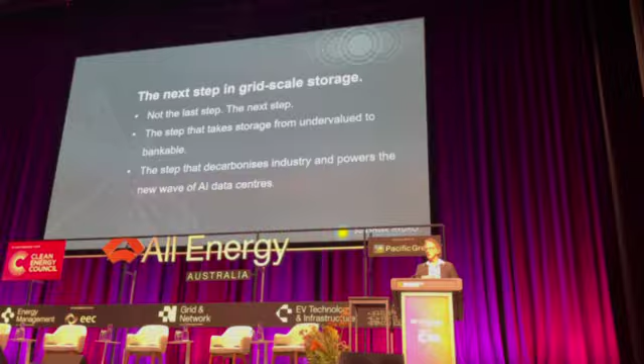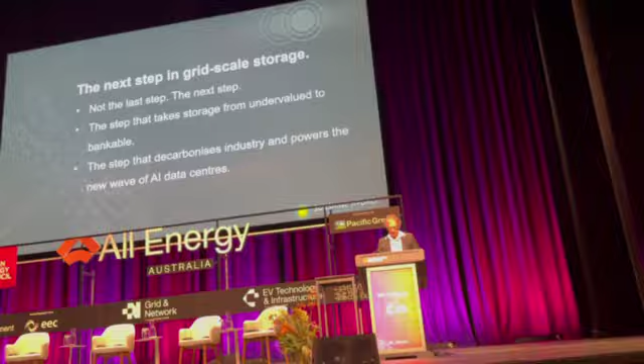The next step takes storage from being undervalued to being bankable. These big essential projects, they must be successfully delivered. We're talking about the ability to make these projects financially viable, and get investors excited about it. It decarbonises industry and powers a new wave of AI data centres, which is also changing within our industry. Australia has a huge advantage in attracting these data centres, and it's already happening. We're seeing it happen over the next couple of years. These new data centres need cost-effective, reliable green energy to prosper.

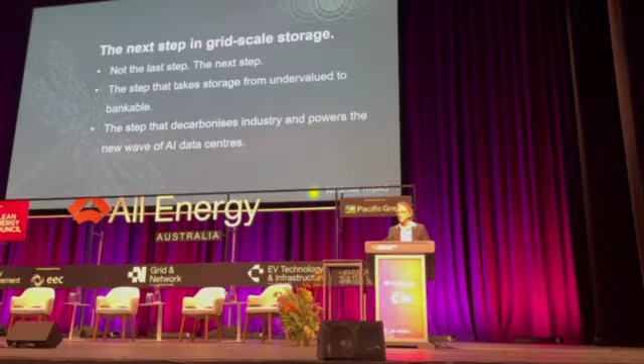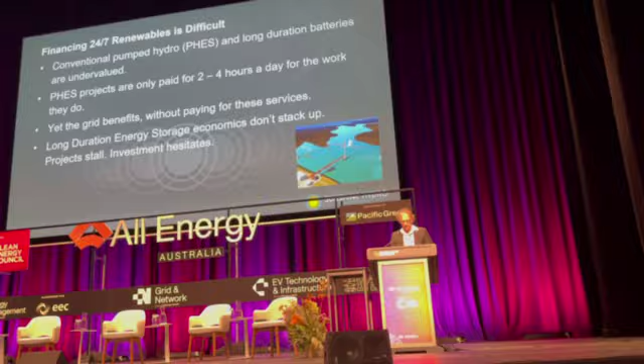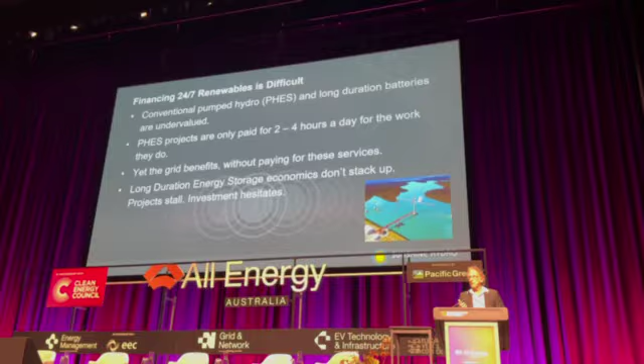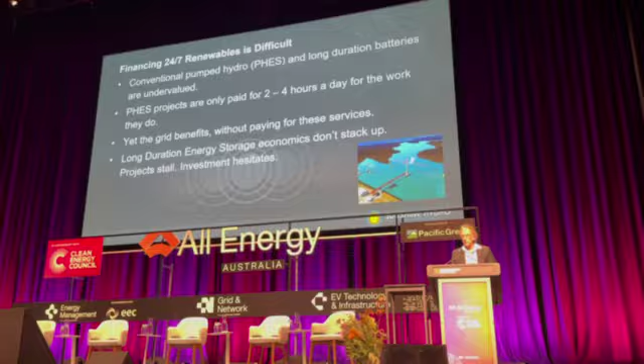So where are we today? Pumped hydro and large batteries, or any long duration storage, they're undervalued in the current system. They're assets that are only paid for 2 to 4 hours a day. If it's a small battery, that's perfect, you can justify it and pay it off in that 2 or 4 hours, it works really well. But for pumped hydro or long duration energy storage, you need more than that, and it serves a greater purpose. Financing these big merchant-exposed projects is really difficult, and that's why long duration energy storage projects stall. The economics simply don't add up and investors hesitate.

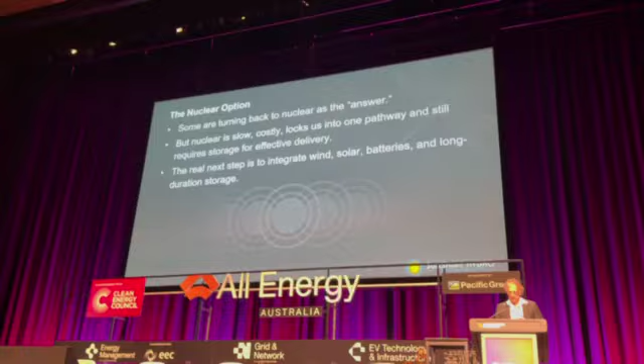Some say that nuclear is the answer, but nuclear is slow, it's costly, and it still needs storage. It may well be the next step for the US or for Europe, but it's very difficult for me to see how it's the next step for Australia at all. It's a little bit too expensive.

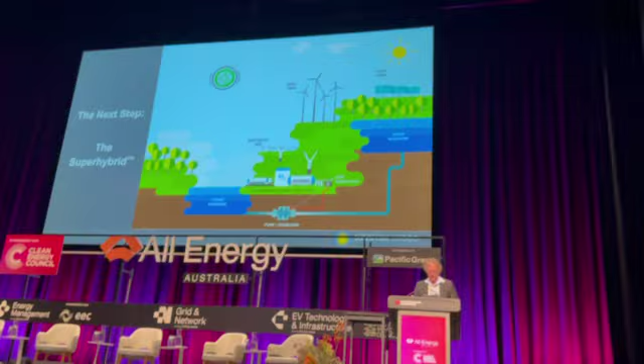So many are coming to realise that the next step revolves around the superhybrid. The superhybrid technology has been developed over the last 8 years to solve a practical problem: how do we deliver 24/7 clean energy to industry at the lowest possible cost? The superhybrid is an ecosystem that brings together renewables, long duration energy storage, and smart optimisation. It reliably matches energy supply to industrial demand every hour of every day.

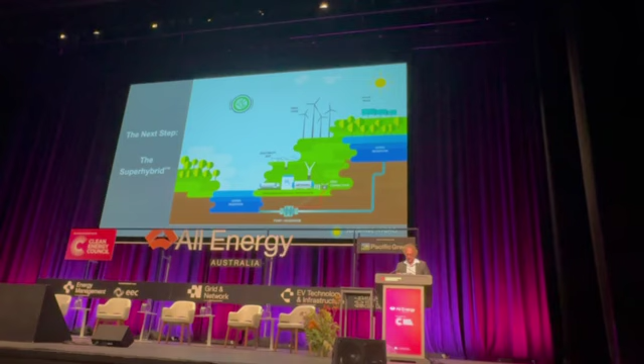When these projects are delivered as public-private partnerships, they can also make smart use of sovereign credit wraps—simple government-backed guarantees that lower the cost of capital and unlock faster investment. The work we're doing with one major production facility to provide for their green energy needs provides a clear example of how this approach works in practice.

So this is a dashboard of one superhybrid running live, and it shows it operating at 4:10 yesterday afternoon. It's delivering 950 megawatts of reliable 24/7 carbon-free energy to the data centre that you can see in the top left corner of the screen.

Every 5 minutes, the system's making decisions on where to best deliver these electrons that come in. As they're delivered from the wind and solar projects, they can be used to pump water to the upper reservoir, to charge the battery, to produce green fuels, to deliver to the data centre, or to sell back into the grid. So this optionality maximises the ability to use every electron as effectively as possible.

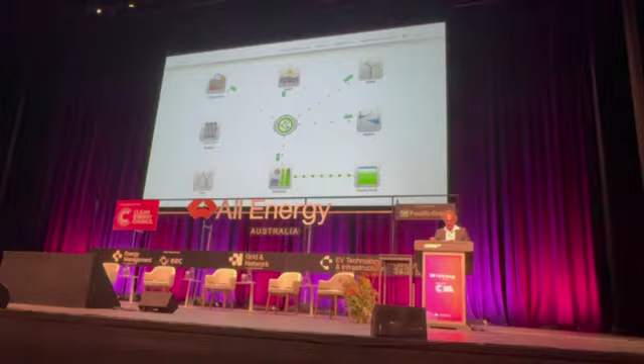The technology behind this focuses on making sure that data centre gets its 950 megawatts 5 years into the future—when everything goes wrong, when the worst scenarios occur, how do we deliver that power? So we're not looking at a daily cycle, we're looking at future problems and being able to provide that to a system that needs 24/7 without doubt.

And it does it in a fun kind of way. Things like, if the week ahead is looking very windy, there's a problem—because if it's very windy and there's low demand, the wind gets curtailed and we waste that energy. But because we can take these electrons and decide what to do with them based on what's happening in the future, we can make sure we've got the energy: we want the reservoir full, we want the battery full, we want to be able to turn off the electrolyser so that we've got maximum power at all times.

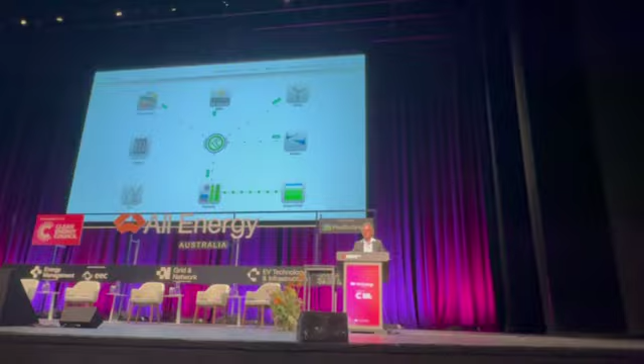But we also need to look at when wind is high in the week to come, that we can value the empty space in the upper reservoir, value the empty space in the battery, and say, let's lower it. Let's optimise it properly. We need that reservoir because of all the wind coming in next week—we need to lower the reservoir so that wind can be utilised. And what that does is protect the other assets: the wind is stopped from being curtailed, same with the solar. So the opportunity is to make use of every electron throughout.

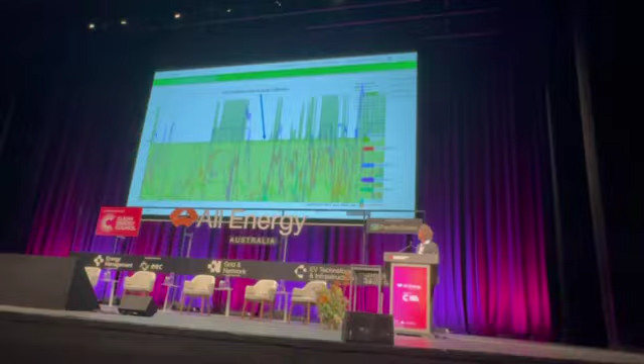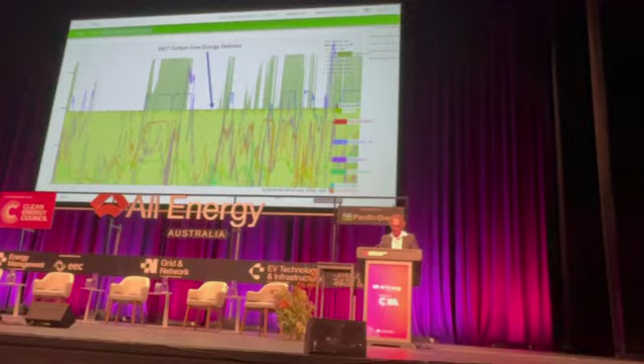So this diagram shows the 950 megawatts. The green line across the centre of the screen is showing that energy being delivered to the data centre. It's 24/7 carbon-free energy, as reliable as nuclear power, but delivered at half the cost.

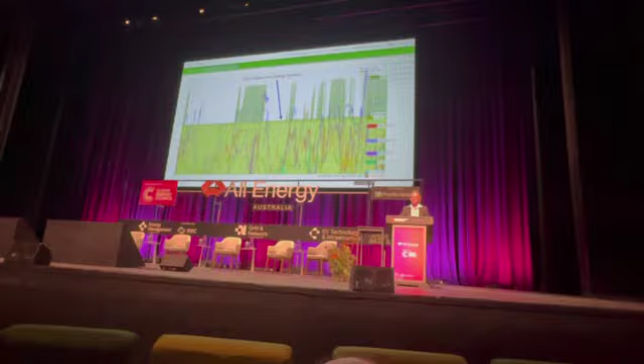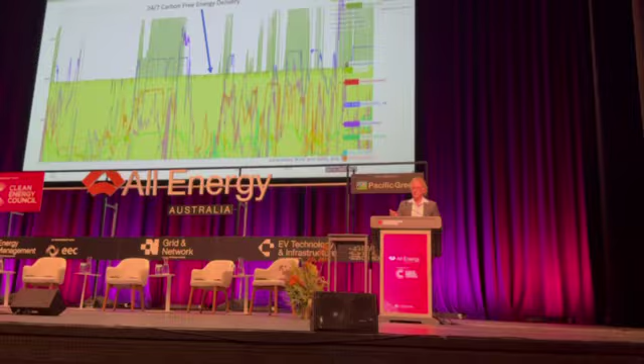On the diagram, you'll also see the spaghetti diagram, we call it—they're all the wind farms producing and providing the wind. At the upper portion of the screen, the darker green is the electrolyser kicking in. The electrolyser is there to produce green fuels, so we've got another contractable revenue, but it's also there to soak up the wind. It's an extra sponge, an extra storage mechanism. And the beauty of it is we can turn it off.

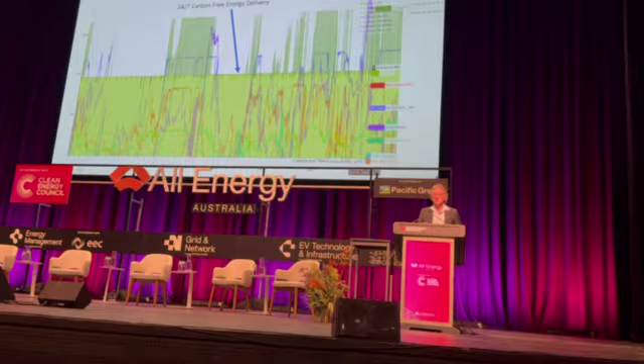We actually value that we can turn it off. It's a little bit unusual the way it works, but that's what ecosystems do. They work hand in hand.

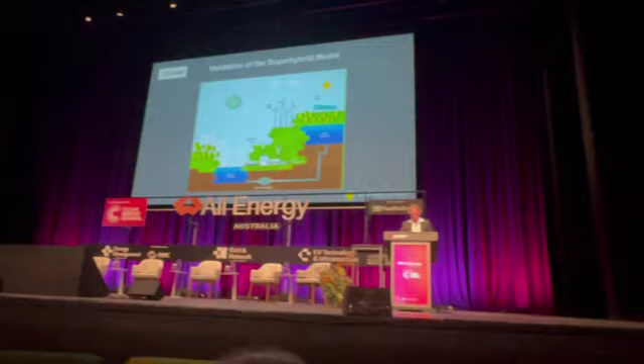The superhybrid model is the result of over 8 years of development, and it's been a massive effort to deliver this kind of change to industry. The US Department of Energy has contracted one of the world's leading laboratories in energy innovation to implement and study the superhybrid model in the California electricity market. They're doing that right now. Their mission: can the superhybrid deliver reliable, cost-effective energy for the AI data centers that they know will need the power? And this laboratory is validating what we're doing on a global scale for the first time.

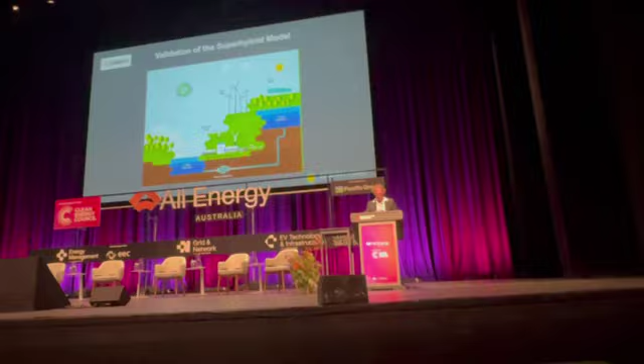So for me, this is a major milestone. I can't tell you how proud I am of the team members at Sunshine Hydro. Some of the best engineers I've seen, the most amazing people to work with, and it's been a true privilege to support them.

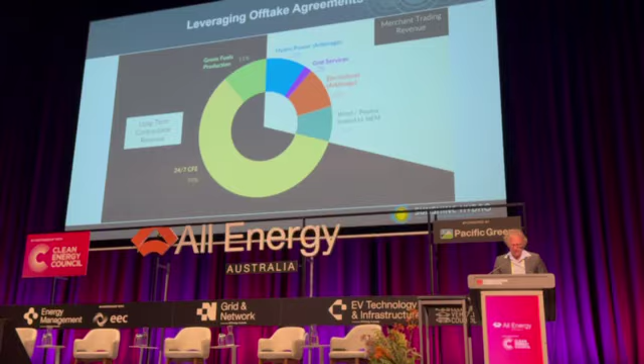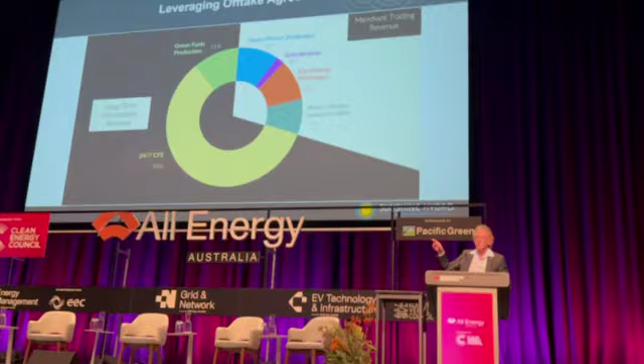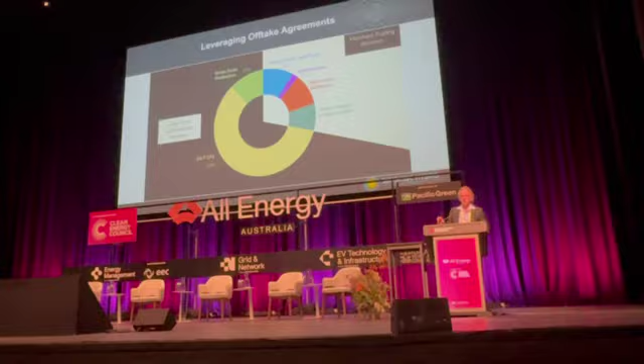For a superhybrid, revenues include both merchant exposed and long-term contractable revenues. The white area is all merchant exposed, and the area in black on the pie chart is contractable. A typical pumped hydro project gains its revenues from only the arbitrage. You see in the top of the screen there's a blue area - that's the arbitrage that a normal pumped hydro would generate as far as revenue goes. And there's a little bit of coverage with grid services that the pumped hydro station can generate revenue from as well.

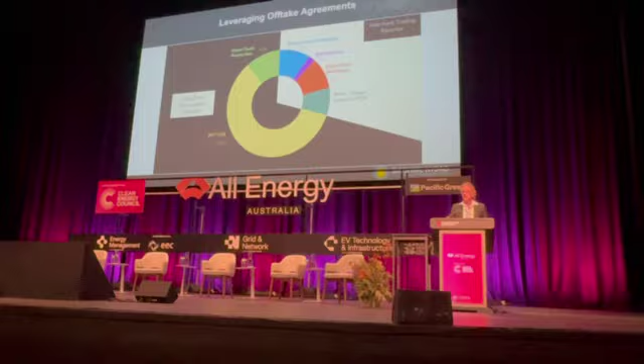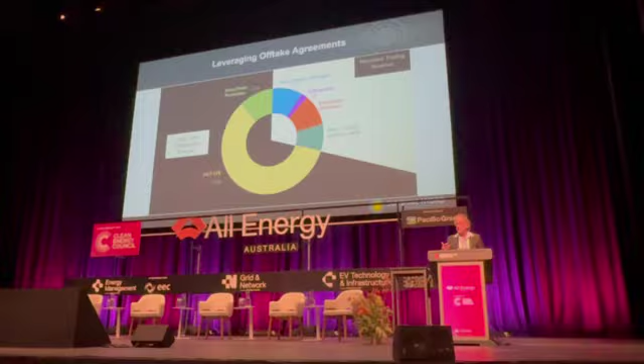But the remainder of the chart is all about the superhybrid, the ecosystem that we developed. And the superhybrid generates many times more revenue than a typical pumped hydro station. So it's a big increase. And most of this revenue, as you can see, is long-term contractable revenue. So that's what makes this ecosystem that we call a superhybrid bankable.

So let's summarise what makes a superhybrid different. Integration of wind, solar, batteries, long-duration storage, plus green fuels. Not 2 to 4 hours of uncertain revenue, but 24 hours every day of contracted bankable income.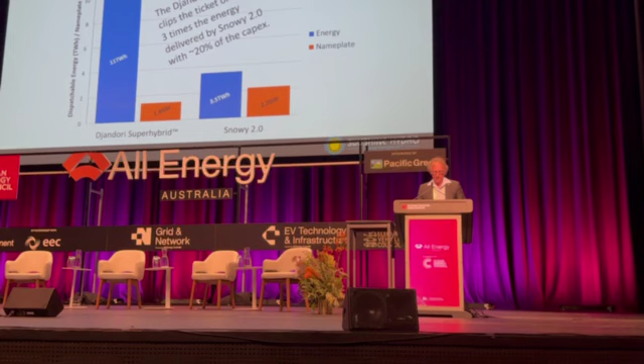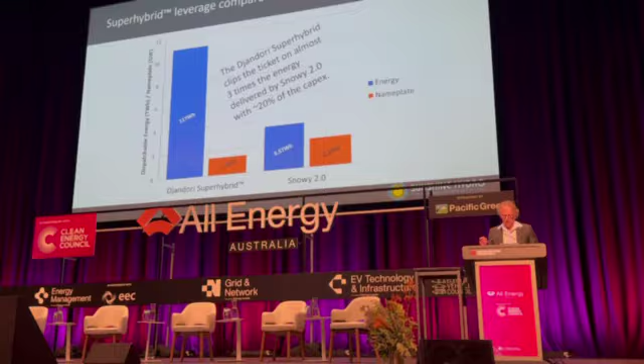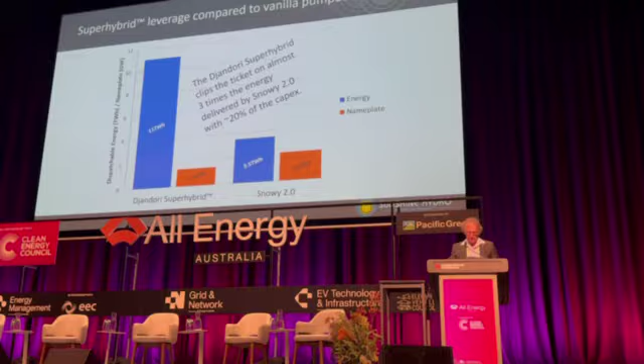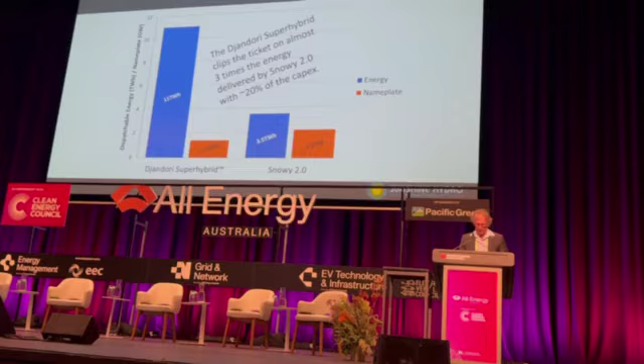Another way to look at the advantage of the superhybrid is to see the leverage it provides. On the left in this diagram is the Djandori Superhybrid project that we've got in Gladstone. And this superhybrid will generate its revenue from 3 times the amount of energy that Snowy 2 will. It's not as big a project. It's doing it with maybe 20% of the cost of Snowy. Not that Snowy is a good one to compare with, because it has kind of run over a bit. But through this simple comparison, it's easy to understand the bankability of the superhybrid model.

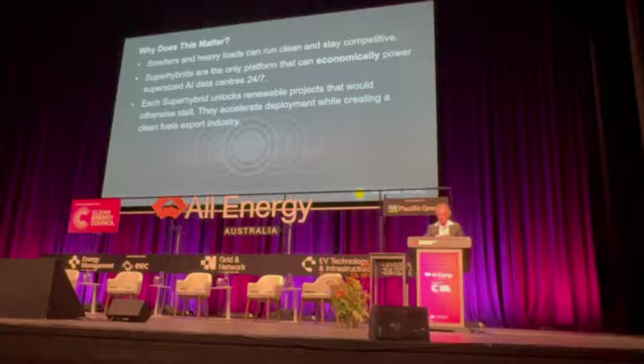So why it matters? For industry, smelters and heavy loads can run clean and stay competitive. For the digital economy, superhybrids are the only platform able to economically power supersized AI data centres around the clock. And for the nation, superhybrids unlock stalled renewables, accelerate deployment, and create and ultimately deliver a clean fuels export industry.

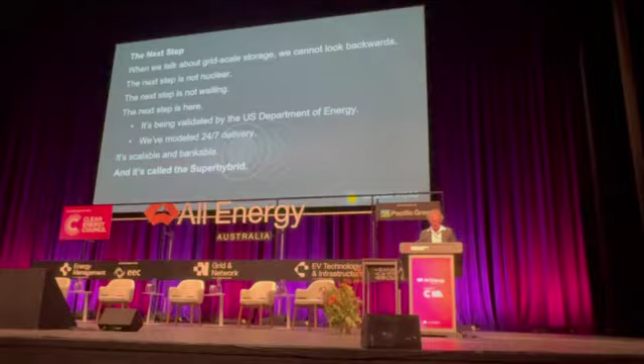So when we talk about grid-scale storage, we can't look backwards. The next step is not nuclear. The next step is not waiting. The next step is here. It's being validated for the first time globally in California by the US Department of Energy. It delivers reliable 24/7 carbon-free energy. It's bankable, it's scalable, and it's called a superhybrid.

And this has an immediate impact. A lot of capital is available to support bankable projects. The superhybrid unlocks this capital. It accelerates the energy transition, bringing forward projects for earlier delivery. It creates wealth in our regional communities through jobs and growth. And it positions Australia as a clean energy technology leader.

So we'd like to see every large hydro or battery project taking full advantage of the superhybrid model. And our team's busy modelling systems in Australia and now overseas, and we're seeing some remarkable results come from these partnerships.